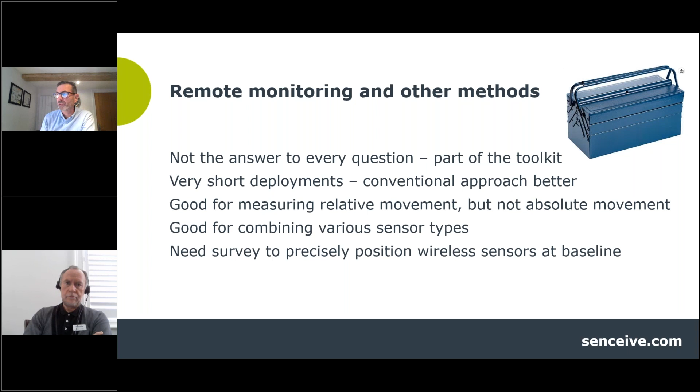For example, if we are looking at an absolute movement requirement, we need to know where our sensors are. So we will need to survey them in through a conventional approach before we start as part of the baselining. And I think for those reasons, this sort of technology is seldom used in isolation. It's generally used as part of a package.

So what is wireless monitoring? I suppose a typical setup will comprise three main components. You'll have some sensors, you'll have a communications platform that will allow you to get data from the site to the stakeholder, and you'll need a data portal to allow you to see what's happening. It's no use just getting the data in a black box. You need to see it.

So the first part of that little ensemble is the sensors, and the most widely used type of sensor is a tilt sensor. This is a MEMS-based device that measures rotation to a thousandth of a degree, which in many applications will equate to a sub-millimeter measurement of rotational movement. So it's a precise tool that can be mounted to pretty much anything at any angle.

It can be fitted very quickly and simply using a magnet to metal, or using quick fix adhesive to wood or masonry, or it can be drilled and fixed into concrete or masonry, and it can be left there for quite a while. In a typical application, it's not unusual to get 10 to 15 years of life from one of these sensors.

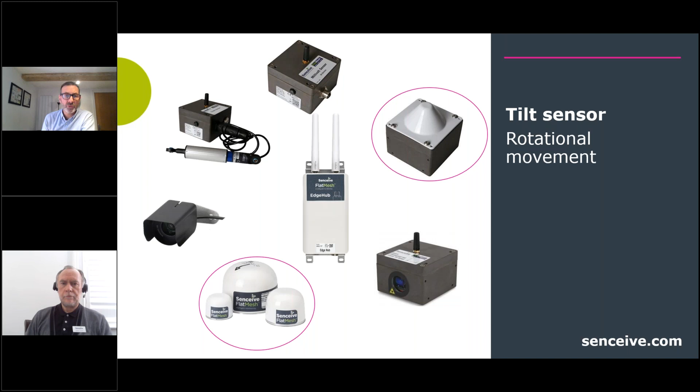And there's a whole bunch of other things. This isn't a complete picture, but just to give you a flavor for some of the other types of sensor that can be included: a crack sensor, a replacement for the old favorite telltale. You don't have to climb a ladder to get the results out of this one.

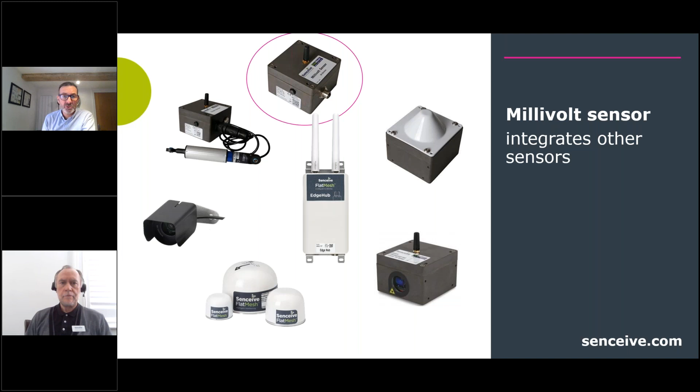Millivolt sensor allows us to integrate our wireless network with a variety of often third-party sensors, so we can look at pressure sensors, strain gauges, torque sensors, load cells, load pins, moisture meters. A variety of different third-party sensors can be brought into that network.

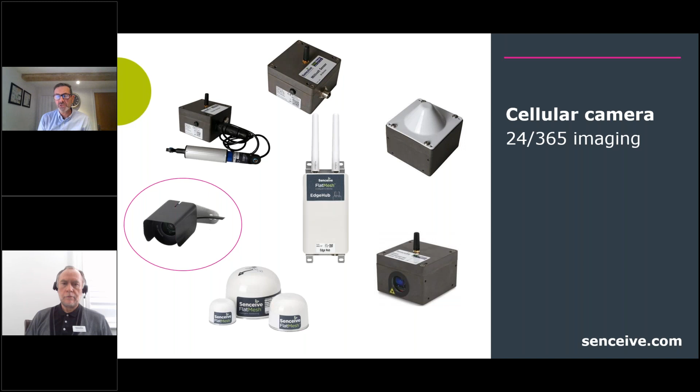If we need to get eyes on the site quickly before we can get boots on the ground, a camera is a very useful way of investigating an alert that our other sensors may have picked up, and allows us to rule out a false alarm. These can be solar powered, so they can be part of an intelligent monitoring system at a remote site. The camera can be triggered by movement from other sensors, so it's a smart way of getting an understanding of what's happening.

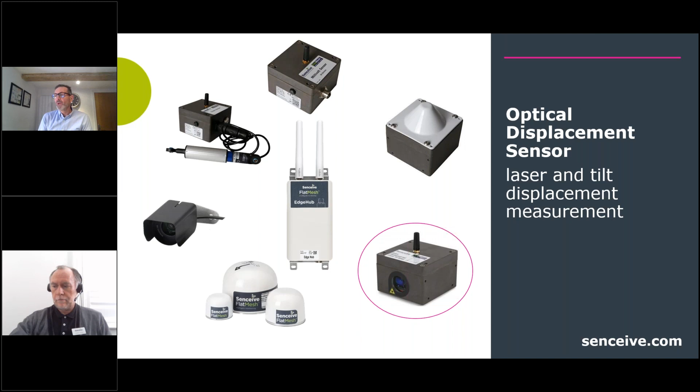We can combine the tilt meter with a laser extensometer. This will allow us to measure the relative movement of two objects: the object the sensor is mounted to, and something it's looking at, for example two bridge piers. We'll have a look at some examples of that shortly. They will talk to a gateway which collates, collects and transmits the data from that suite of sensors to the cloud, and onwards to a data portal where you can interact with it.

All of that relies on a communications platform, and there are a couple of important choices here. If you're looking for a dense network of sensors with high frequency reporting, you want to include multiple sensor types, you want to power your gateway from a solar panel, if you want a level of intelligence built into the nodes that can react to events, then the logical choice is what we call a flat mesh system.

It operates at a relatively high frequency part of the radio spectrum, 2.4 gigahertz. It's a highly responsive way of connecting a large variety of sensors in a dense network in a short place for high-speed reporting. It does come with some limitations: we can only include up to 100 nodes per gateway, and we have a distance limitation of up to about 300 meters in best conditions between the gateway and the sensors.

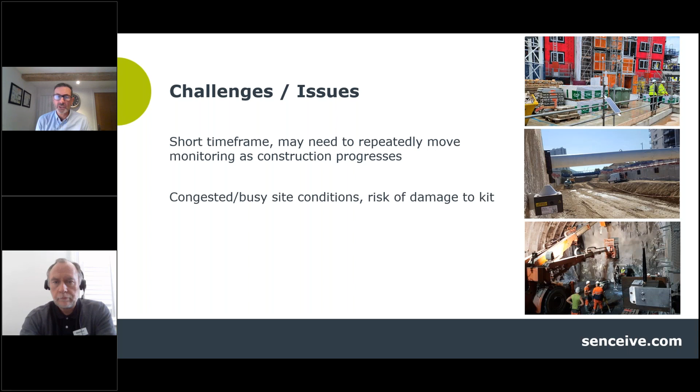If we consider some of the challenges on a construction site, typically we've got time pressure. We may need to repeatedly move the monitoring as the construction progresses. We may have busy, congested site conditions with a risk of machinery damaging the kit. We may well have concerns around the risk of harm to people, surveyors or engineers. And if we can find a way of gathering data from awkward places like confined spaces or height by putting instruments rather than people in those places, then that's generally seen as a good thing.

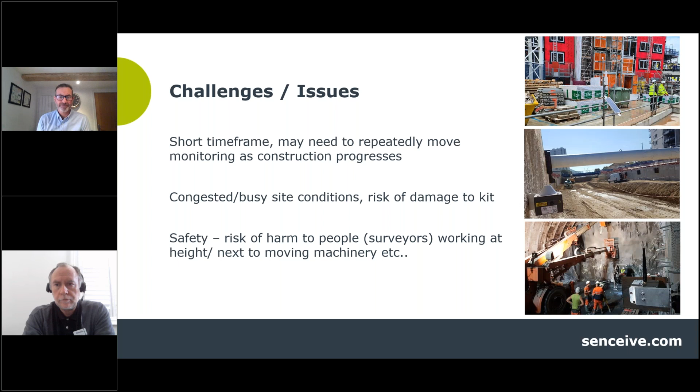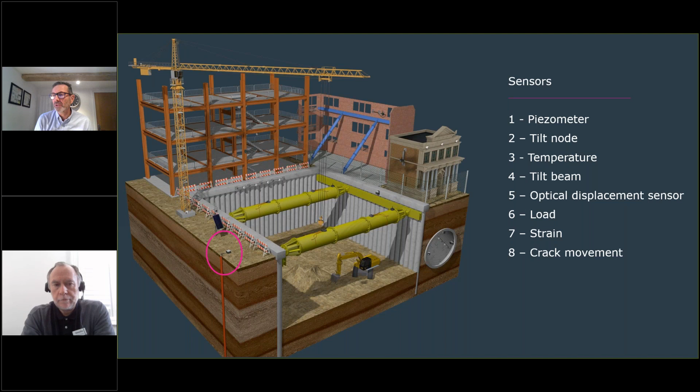So if we take a typical construction site, that may comprise excavations, tunneling or big pipe work, tall building construction, retained elements of a previous facade of a building, and neighbours with important property in close proximity to our construction site. I think there are ways in which the suite of wireless technology can help protect and assess all of those elements of the site.

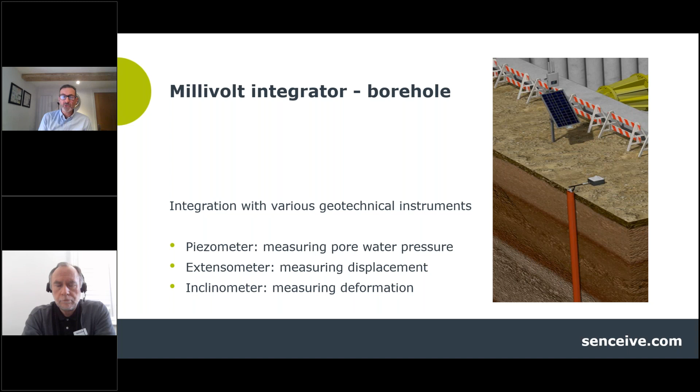So if we start here underground, we've got our millivolt integrator sensor, which can allow us to incorporate a number of borehole related instruments. We can bring a piezo into the system to look at pore water pressure next to the excavation, connect to an extensometer for displacement, or an inclinometer for deformation. The tilt node is pretty much our most used, most favorite tool, measuring rotational movement, with hundreds of applications on a site.

In this case, we've just picked a couple of examples. A temporary structure here, looking at the crane base, can be installed in just a few minutes. A nice discreet little object, no trailing wires, it can be hidden somewhere in a corner where it'll be protected. It looks quite huge here, but it's really not much bigger than a tennis ball, and it'll give us early warning of any incremental, or heaven forbid, sudden movement of the crane base.

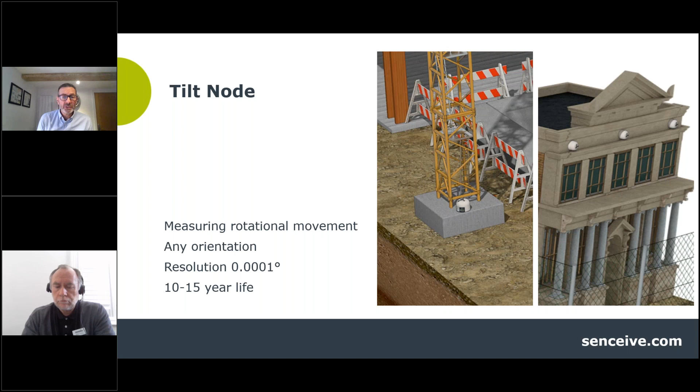The other example I've pulled out here is looking at the adjacent property, in this case a rather nice historic stone building. Obviously we want to look at any movements that our excavation activity are causing to the neighbours.

We can take one of those tilt sensors in isolation and look at what's happening at that specific point, or we can mount it to what we call a tilt beam. This is a lightweight, rigid stainless steel beam with joints that allow for thermal expansion and contraction, and this enables us to look at movement over a longer, wider area.

For example, here we've looked at the ring beam around the excavation, and we can look for settlement of that, or we can look at movement within the tunnel in this particular site. Another classic application is masonry brickwork structures, where the movement of an individual brick may not necessarily be representative of the wider structure. A brick tunnel lining, for example, is capable of plastic movement, wider deformation, and if we're interested in that, we need to use a tilt beam to look at that wider movement.

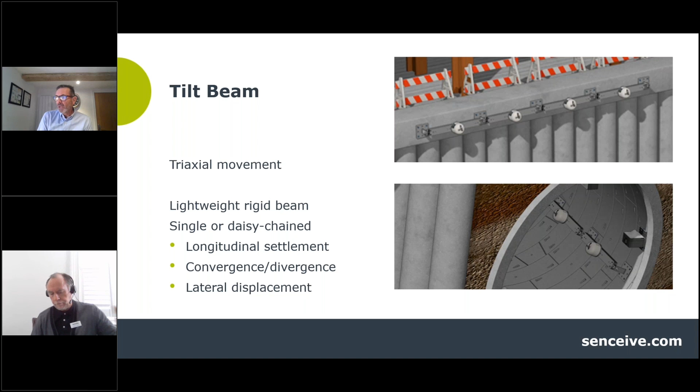Moving around our construction site in this quick tour, we might be interested in looking at temperature, for example curing of concrete in isolation, or we might be using a temperature sensor incorporated with a tilt sensor to look at cyclic patterns of movement. For example, here on the steel structure, we can look at how that behaves differently through the day as the sun hits it, then expands and cools later in the day.

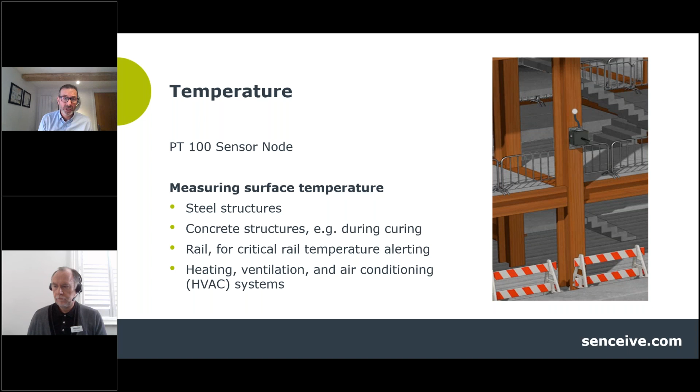Other applications in rail include critical rail temperature alerting, or in heating and ventilation systems, the temperature monitoring system can be quite useful.

In terms of temporary works, in this case prop loads within the excavation, we could use a vibrating wire strain gauge. We find that the loads within these props can vary quite significantly with temperature and other factors. By spot welding or gluing the strain gauge to the steel tubing, we can get data that allows us to look at the axial loads and bending moments in the tubular steel props.

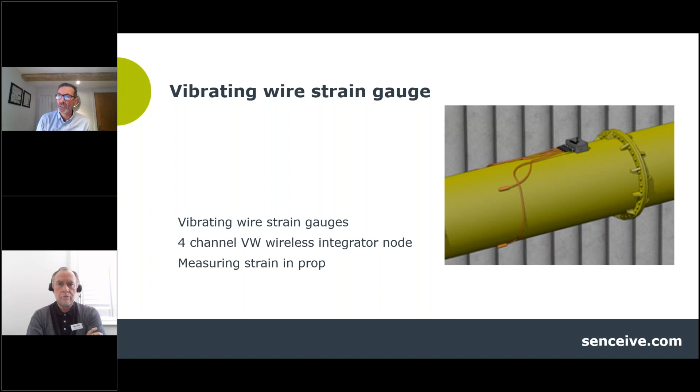The benefit of that is obviously we reduce the risk of failure, but also we can often optimize the number of props needed, giving us reduced cost and more headroom to operate machinery in that excavation. Moving a little further along the same prop, we can look at the crucial work done by the load pins, measuring the load and strain within those pins with a wireless sensor - another example of the same technology.

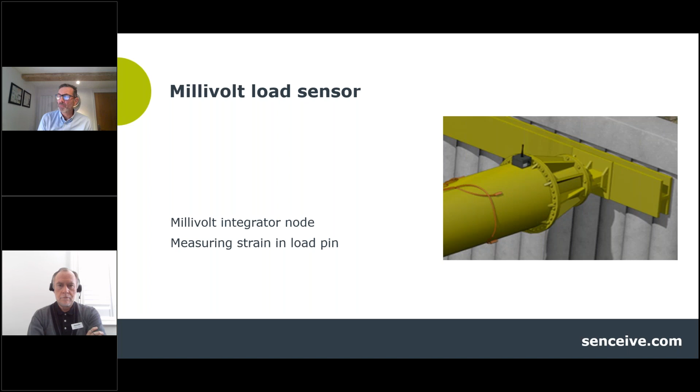Looking at the retained facade, a crack sensor applied here lets us look at the relative movement across that crack. Getting to that point and manually monitoring an old-fashioned telltale would be difficult, but once this is installed, it's fairly painless. There's a range of other applications as well as cracking - it could be used for relative movement across a pile separation, a bridge joint, or other common applications.

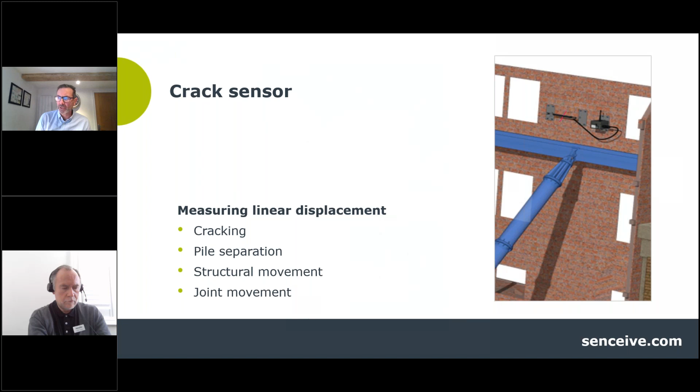Just to look at an example before we move away from construction, a fairly typical construction site. This one is located in leafy Harpenden in Hertfordshire. It's construction of a 5-story apartment block with excavation for a basement, and it's very close to existing residential properties and a piece of wall which is actually a listed structure. It's a pretty straightforward, relatively routine application of this sort of technology using 22 tilt nodes and a single gateway, employed at an early stage in the construction in order to get baseline data throughout the construction and for a short period thereafter. So a fairly common application of this sort of technology on a construction site.

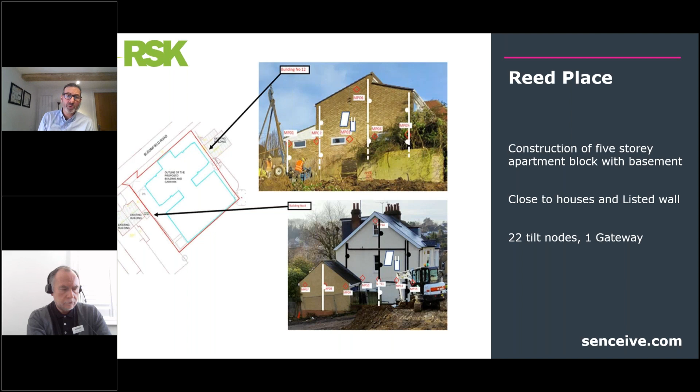That could be there on this sort of site for a year or two, often less, and the same equipment could be redeployed to other sites and reused in other places. You can see here the tilt nodes mounted to the masonry on short 1-meter tilt beams.

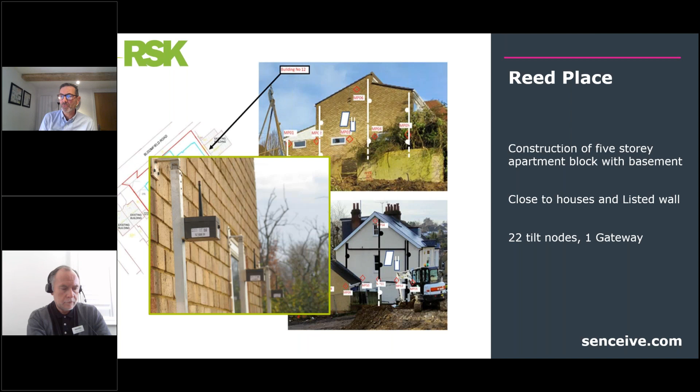So moving swiftly on, away from construction, to the world of railways, and a variety of applications here, particularly looking at track and at earthworks. We've got a familiar set of our family of sensors - I'm not going to dwell on them now, I think we're probably fairly familiar with them. They're applied to the structures, to the track in that railway environment, but they're also applied to something we haven't seen in the examples so far: the earthworks, the slope above or below the railway.

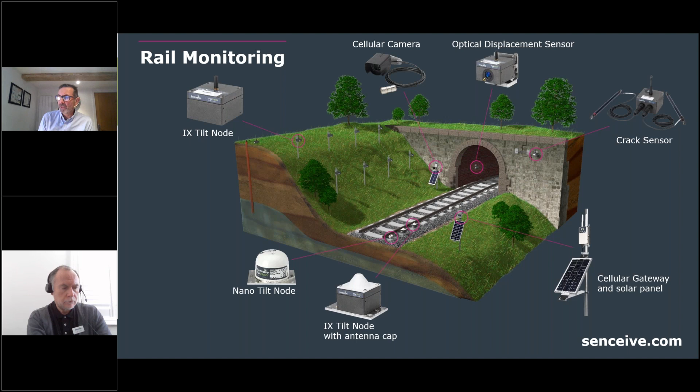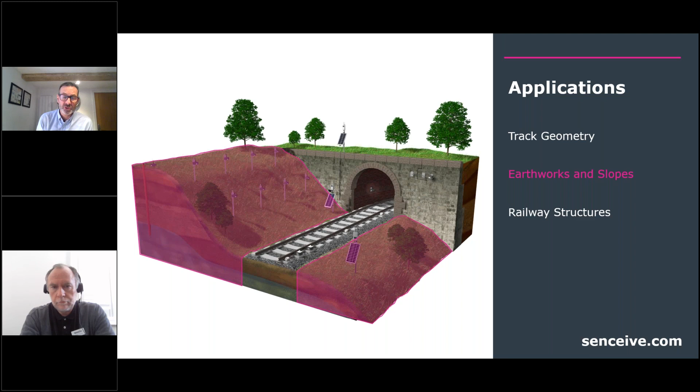Now, slopes are a hot topic at the moment. Climate change is putting increased pressure on the stability, the integrity of earthworks on the UK rail network. The number of slope failures is increasing with hot, dry summers and extreme periods of prolonged rainfall in the autumn and winter.

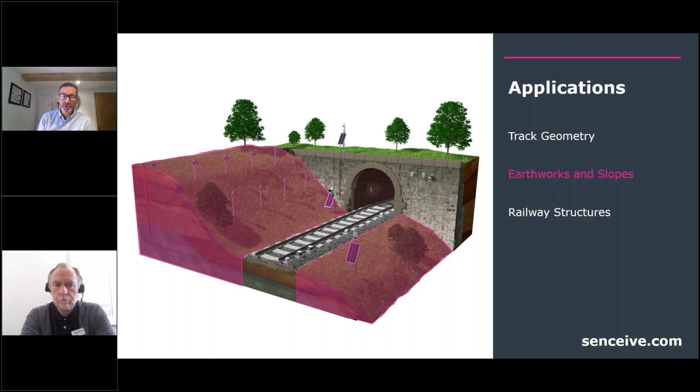Network Rail have worked with this sort of technology over a period of quite a few years now, and I really wanted to show the result of that. So the challenges that I think are faced here are numerous.

For a start, the assets are old, mostly over 130 years old. They predate geotechnical standards. They're mostly extremely steep compared to modern earthwork constructions. They're often at awkward places to get to, because they're a long way away, or they're in the middle of a suburban, densely populated residential area. They're difficult to get to, and there's a lot of them - there's 191,000 cuttings and embankments on the UK rail network, plus London Underground and others. And they're vulnerable to climate change.

So going back before my time in Senceive at least, but quite a few years ago now, a number of measures were taken to explore the use of tilt sensors as a way of looking at both incremental long-term movement of slopes as well as sudden movement, detection of sudden movement events.

So many of the existing technologies out there are reliant on scheduled sampling in order to preserve battery life. Now, if you're running trains down a track every - if there's 10 trains an hour, 20 trains an hour down a busy suburban track - it's no good just getting data updates every 30 minutes. You need something that responds to events as they happen, or very, very close to that.

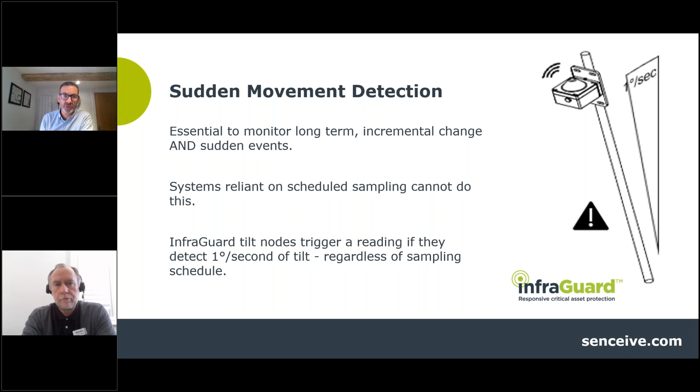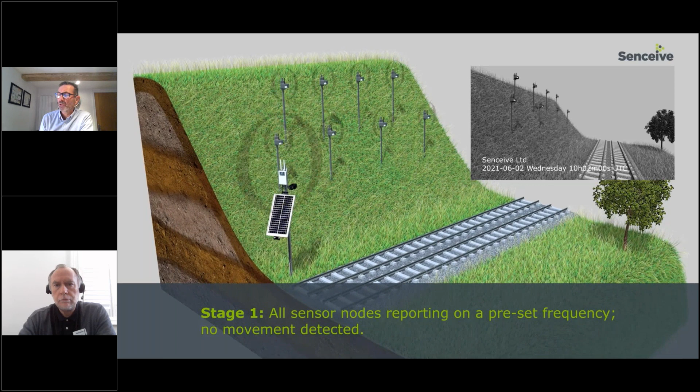If I could just show you a little animation, I think that becomes a bit more clear. So in a passive, stage 1 environment, all the sensor nodes are reporting at their preset frequency using very little battery, and no movement is detected. Routine updates are sent - a couple of photographs a day will typically be sent through an online database.

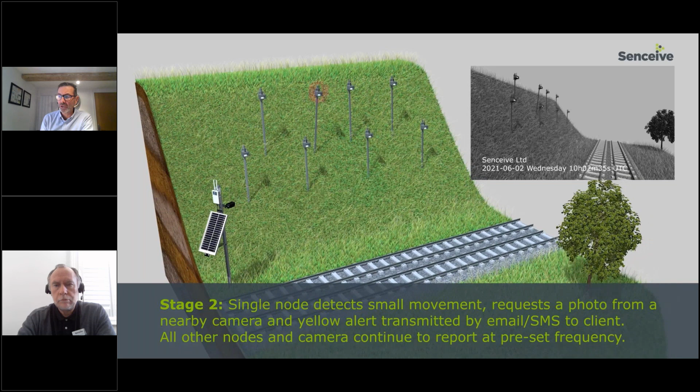If one of those nodes picks up a small degree of movement, then it will request a photo from the nearest camera. It will send a low-grade alert to the stakeholders, and the other nodes will continue to function as they were in their low-power mode.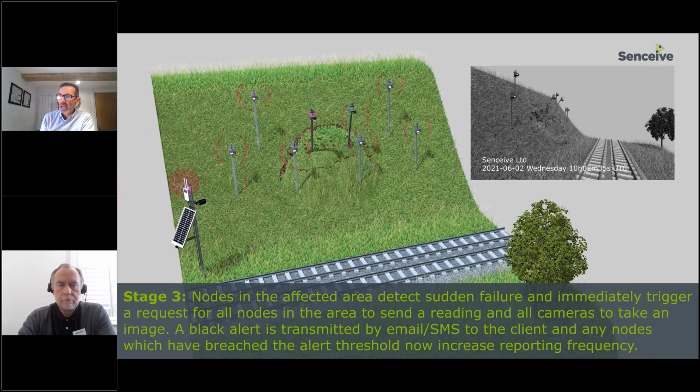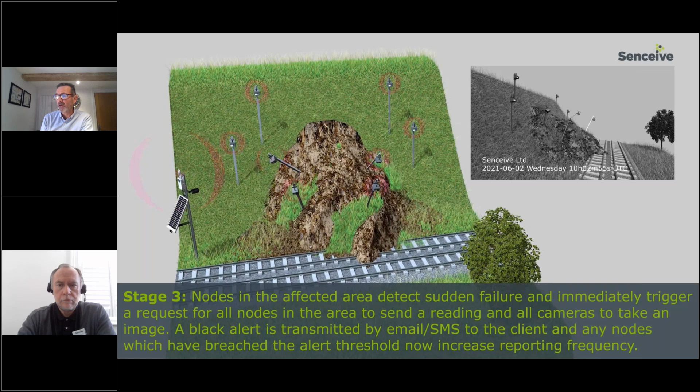So if things get a little bit more Hollywood, and we've got a larger scale movement detected by numerous sensors, then all of the nodes in that area will be set to transmit at their highest frequency. A high level black alert will be sent to the stakeholders, and a picture will be sent as soon as the network can support that.

So this is a really neat integrated system that comprises the sensors that detect the movement, the camera that can give you the picture of what's happening, and the gateway that can communicate that, typically within a couple of minutes, to your mobile phone or your desktop.

And typically these things, of course, happen at around about 2 in the morning on a Saturday night, because that's just the way it is. So those alerts will come through in time to either send out people to deal with it on site, or to slow down or stop the trains on that track if the pictures and the data suggest that's necessary.

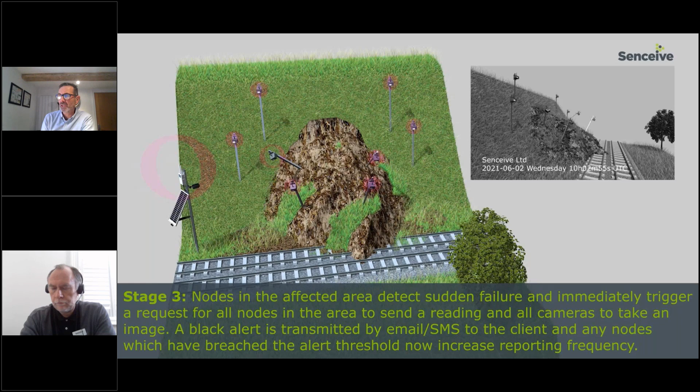I think it's worth looking at the imagery from those cameras. These are bespoke cameras built specifically for this application, with software that can deal with low light conditions. We obviously can't use a flash or illumination-based system, as that could disturb train drivers. So this is a system that relies on software to intensify the available light.

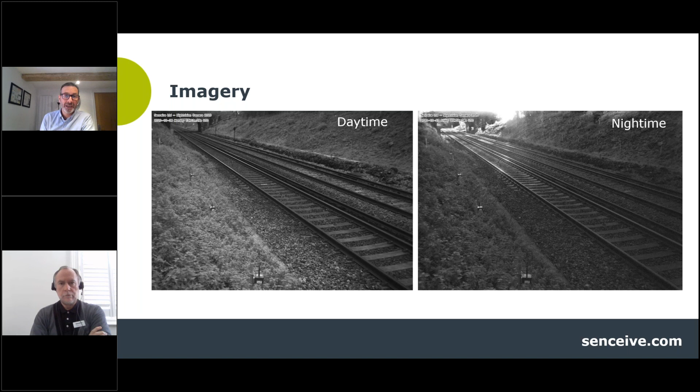We can see here a picture taken around midday on the left, and around midnight from the same site on the right. It's a functional system good enough to see whether there's been an incursion of material onto the track. It's also good enough to pick up a deer rubbing its backside on one of the tilt nodes, raising a false alert. So it gives us eyes on the site.

If I look at an example here, this is a particularly troublesome and challenging site at Wadhurst in Kent. Readers of Ground Engineering and other publications will, I think, be familiar with it.

I quite like this example because it demonstrates the system working in both modes. In this piece of data, you can see readings taken over a 12-hour period and a significant, noticeable spike - a movement of over 200 millimeters - which took place at about 2:40 in the morning. And I bet that was on a Saturday. So we've got detection of sudden movement from a single tilt node.

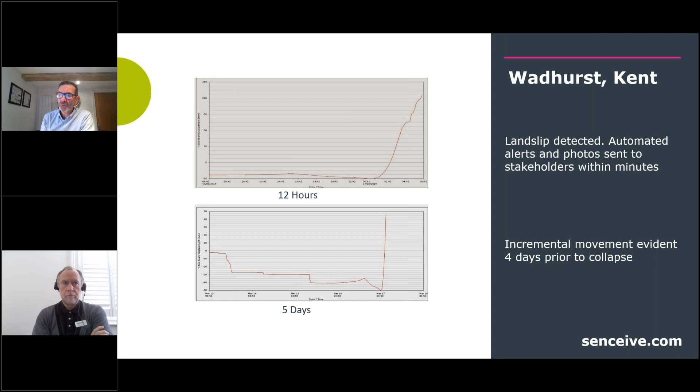If we look a little further back in that timescale, you can see over a 5-day period a series of very small, incremental steps, which in hindsight could be taken as indicative of that movement leading up to the sudden collapse. I think that's an important area, and as time goes by and we look at more data from these applications, the ability not just to detect but also to predict slope failures is going to become quite interesting.

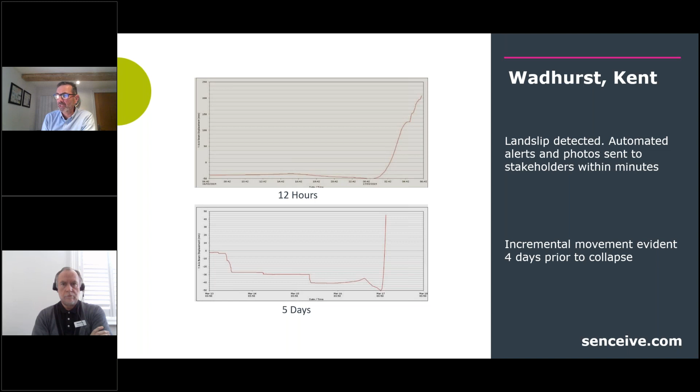Network Rail are faced with hundreds of these to varying degrees per year - many relatively small, but still with the capacity to cause a lot of disruption and even danger of derailment and risk to life. This system is now installed on over 40 kilometers of track, with over 20,000 sensors, cameras and gateways installed, mostly at sites in southern England.

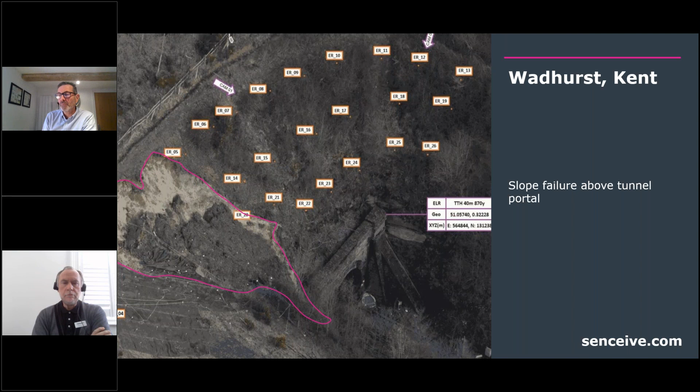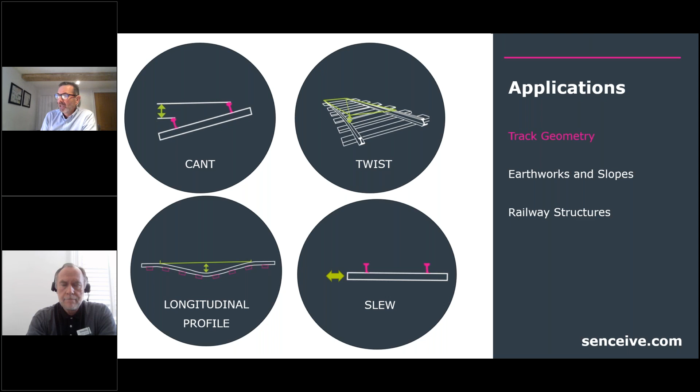So moving on to the final part I'm going to cover now - track applications. We can use a variety of different geodetic survey options to gather data about track movement, particularly in the form that permanent way engineers are interested in, including cant, twist, longitudinal settlement or change in profile, lateral movement or slew, or track buckling. I'm just going to pull out a couple of those.

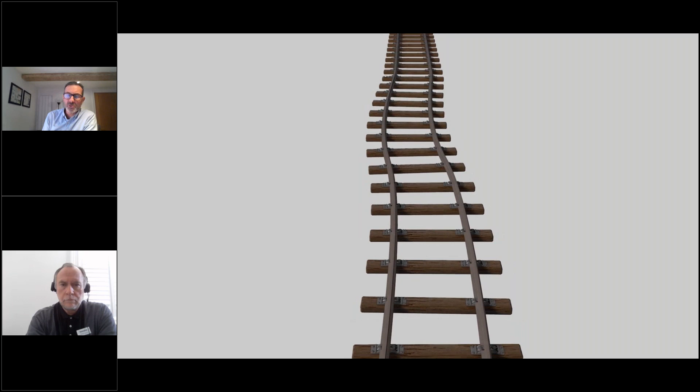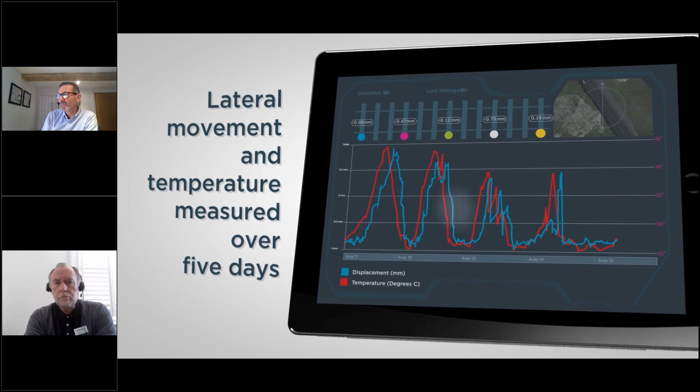If we start with slew - this, of course, was hot news during the hot temperatures last August, when a lot of the network was closed down because of the risk of steel rail buckling in the heat. Well, one way of getting early warning or practical understanding of that is to use an optical displacement sensor mounted to a physical object, looking at the rail, detecting localized lateral movement in the form of buckling, and presenting that together with a graph showing movement and temperature - in this case over a 5-day period, where red represents temperature and blue represents movement.

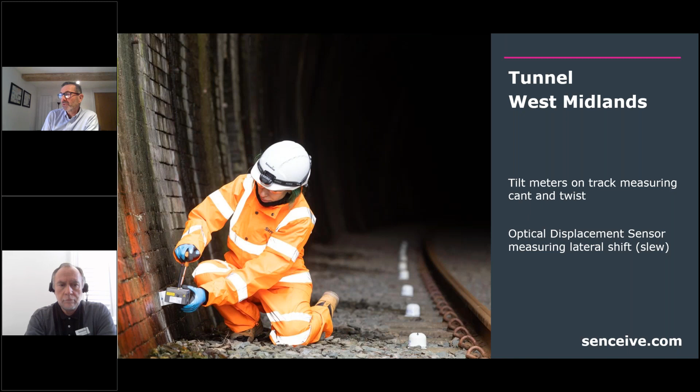In practice, this is quite widely used. You can see here an installation at a tunnel entrance in the West Midlands using the optical displacement sensor on the masonry wall. The other example I wanted to pull out was how we can measure change in track twist movement using the tilt node fixed to a sleeper.

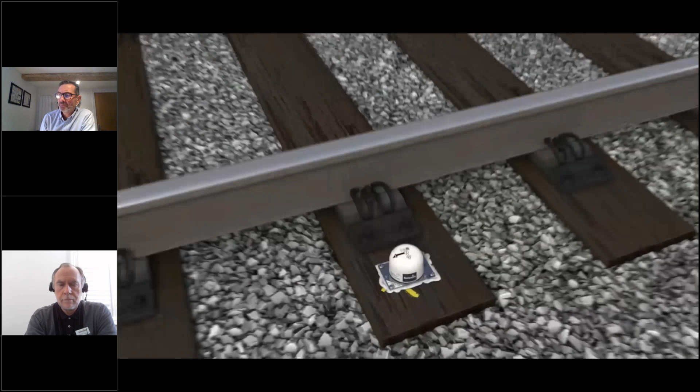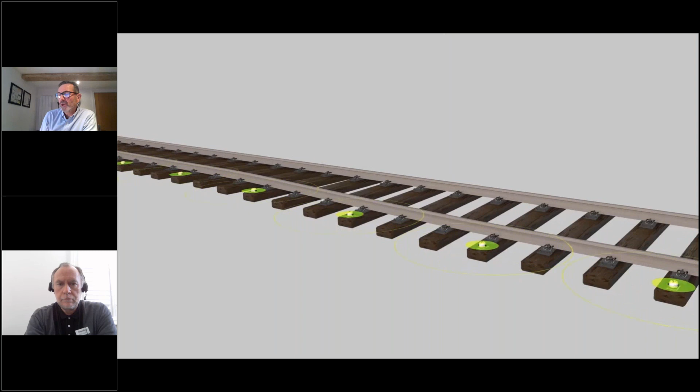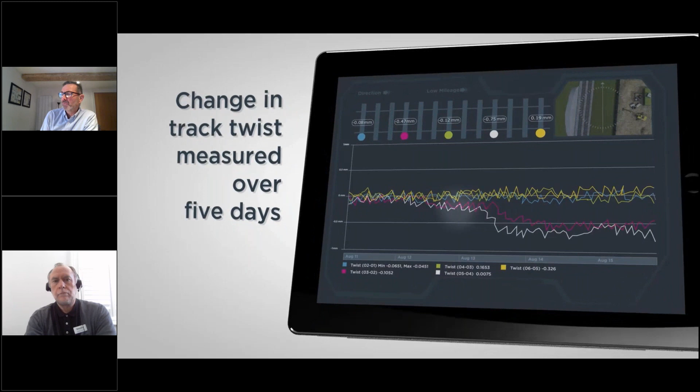And at this particular site, we've got a cause of movement, adjacent construction activity. We've got nodes on every third sleeper, and where there is a differential movement of one rail, in this case, the rail nearest the excavation is settling, and a couple of those nodes are picking that up in our Web Monitor platform. So just really a snapshot there of how that can be used.

And there are thousands, probably tens of thousands of nodes out there right now in use on the network, looking at those types of condition. An example relatively close to my home in Cambridge at least, and this is the A14 viaduct construction, where tilt nodes were installed on the East Coast Main Line before, during and after the construction of that major viaduct.

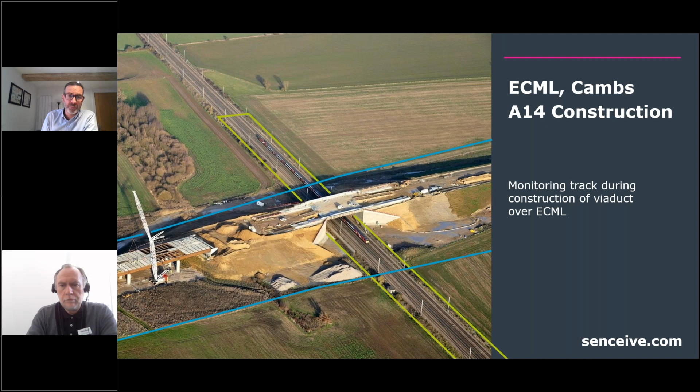So on that note, I promised to take 30 minutes, Pete. I've gone over by 25 seconds by my count, so I'm not going to tell myself off too much, but I will hand over to you. Thank you, Simon. Great job. In fact, you've done such a good job, I'm thinking of letting you carry on.

Yeah, thanks to Simon, my colleague. I'm Peter Jones. I've been with Senceive about 4.5 years now. But like Simon, I'm an old timer. I've been in the business, whether it's foundation engineering, pile testing, for about 35 years, since 1988. And of those, I've worked about 23 years overseas. So together we have quite a lot of experience in this sort of business.

So in terms of infrastructure, obviously, Simon has gone through rail and construction. There's a lot of compatibilities, a lot of the same sort of issues and metrics and monitoring that we tend to monitor, whether it's for construction or it's for infrastructure. So it could be roads, it could be tunnels, it could be dams, and similar sort of instruments such as piezometers, tilt nodes, crack movements are very similar in the infrastructure world as well as rail and construction.

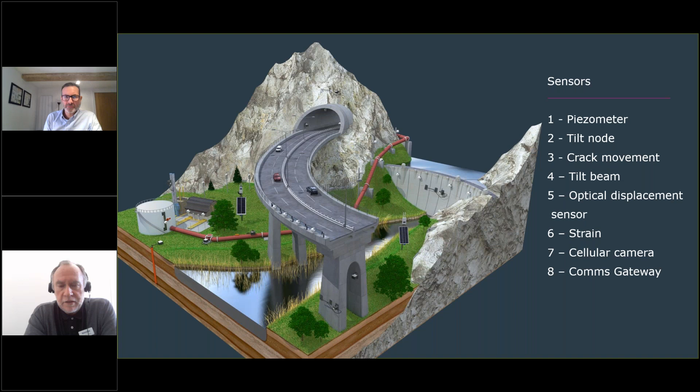So I won't go through all the particular types of instruments again, which Simon has already gone through. So we'll just look at a few examples of where we've used them. So obviously with assets, there's a lot of aging assets in the UK and a lot of countries. Obviously, their assets are much newer than ours, which doesn't necessarily mean that you shouldn't monitor them. I'm a big fan of monitoring from new, so we understand what the normal movement, the normal performance is of an asset.

But if I was an asset owner, I'd want to increase the lifespan of my asset. I'd like to increase the utilization. And if we can monitor them, then obviously we have a better understanding of how long we can increase the asset use from a safety point of view. So obviously there's many issues of bridges and structures failing. So structural health monitoring is absolutely of imperative need when you're talking about the older infrastructure. As I said, to a certain extent, a smaller amount of monitoring is good on any structure, but the older it gets, the more things start going wrong. So we need to do a little bit more of the monitoring.

And obviously there's a lot of pressure to take people away from sites in rail to keep boots off the ballast, as they say. And I think also COVID has to a certain extent shown us that when things happen, such as we're prevented from moving around, it's good to have that instrumentation there, monitoring remotely, always giving you that information. Can you just, next slide, Simon?

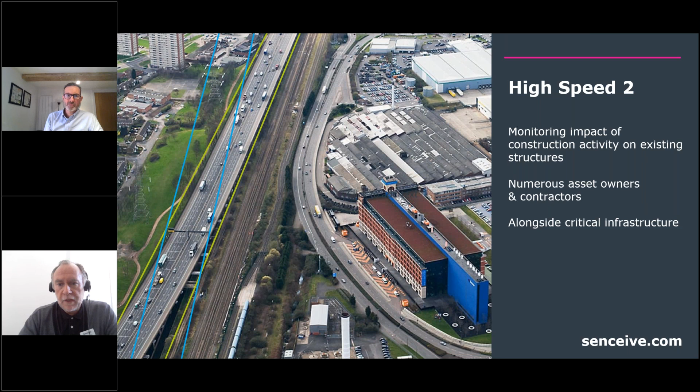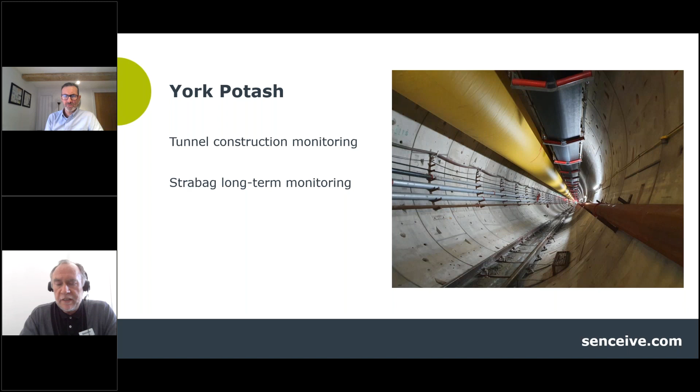So obviously they're looking at the short-term monitoring effects, the deformation that can happen after construction, but also from a long-term point of view, they want to see if the tunnel is going to deform over time.

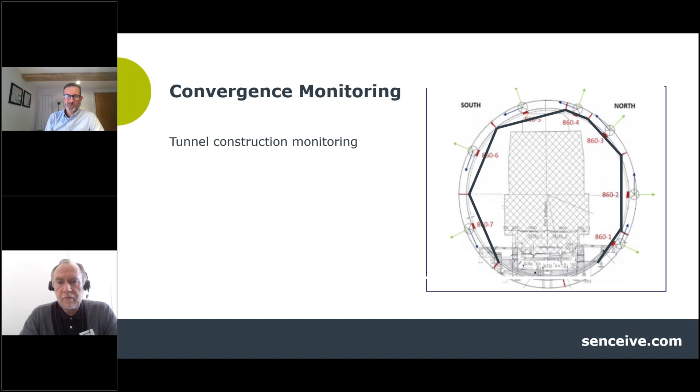Once the new tracks had been put in position, the nodes were then put onto the new track sleepers, so that the ballast and foundations of that new track could be monitored for, I think, about 2 or 3 months, to make sure there were not going to be any settling in problems occurring.

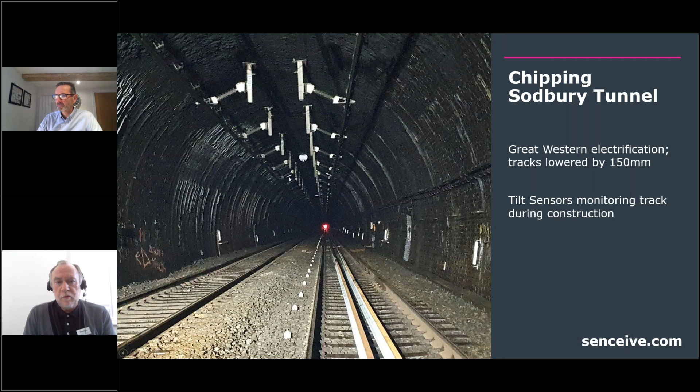Additionally, the tunnel itself was expected to deform due to the reduction of the track base. So there were a number of tilt beams which were installed by AECOM. Unlike the potash tunnel, which I just showed you, AECOM were able to analyze the deformation by a series of non-interlocked beams.

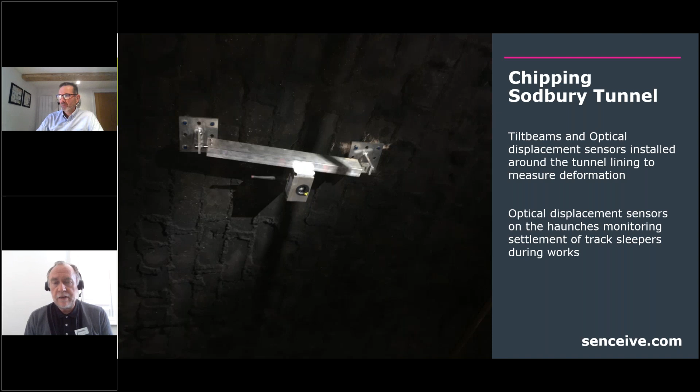Now, that's something that we don't do. We just provided the equipment in this case. But if you're going to be analyzing deformation with non-interlocked beams, you obviously need a much greater skill. So our skill was supplying the equipment, and AECOM's skill was interpreting the data and checking that there was no deformation in the tunnels at the same time.

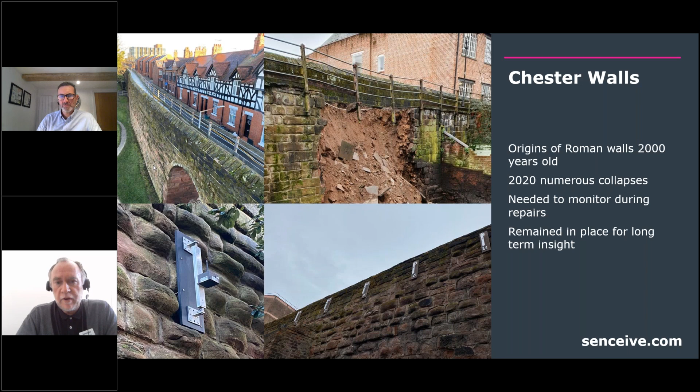Chester walls, an example again of use of tilt sensors in a different application to all the ones we've used before. The walls of Chester are Roman origin, 2,000 years old. There's been quite a few collapses. So while they're actually waiting to do the repairs, we've been providing tilt sensors to monitor the walls to just check that they're remaining stable or whether they are continuing to move. Obviously, the client and Chester County Council are aware of where they should put their resources first in terms of doing the construction to repair all these collapses.

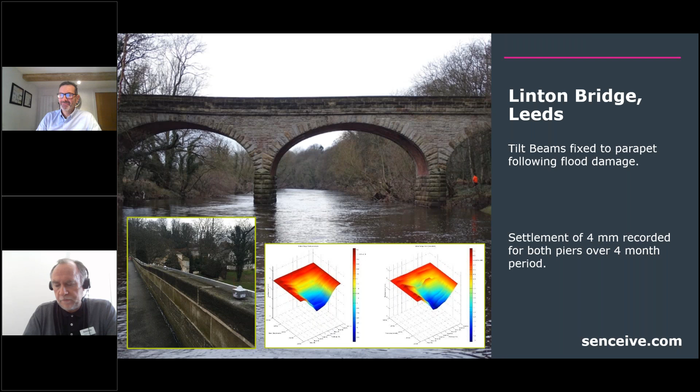Thank you there, Pete. Is that the last one, Simon? I think so. So, okay.

Thank you for that. I just wanted to wrap up with a single little summary slide. I'd hope that we've given you an overview of this sort of technology, that we can answer quite a lot of questions, but not everything. And I'd hope that we've highlighted the benefits of this sort of technology: that it can be installed very quickly without specialist skills, that you can get lots of data from high frequency sampling, far more than you could get from a conventional approach, that it's a sustainable approach, it can reduce your travel and carbon footprint, that it delivers benefits over a very short term up to a very long term, and hopefully with that combination of advantages, it can save you a bit of money, provide a cost-effective solution that can reduce risk and give you a useful tool in the toolkit. So that's pretty much us done for this session.